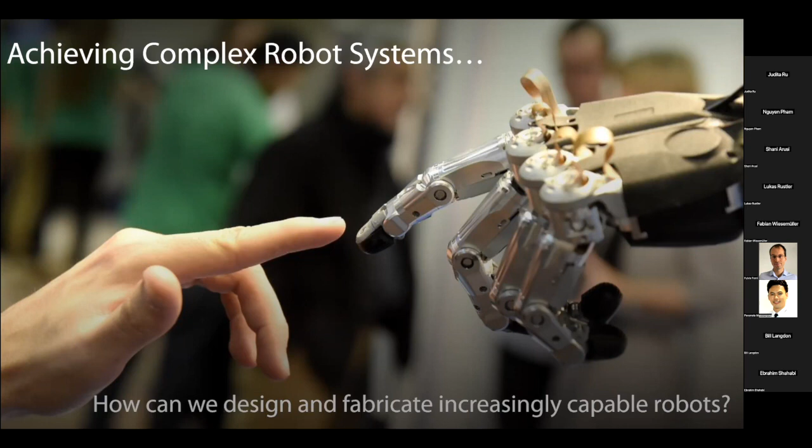And what I'm really interested in is picking up on some of the topics Cecilia talked on yesterday about this idea of ecological niche. How do we extend the capabilities of current robots from being able to operate in a very small niche environment with a small range of functionality to be able to move towards the capabilities of humans or even animals, where they can operate in these wide varieties of environments or ecologies amongst different other humans or different animals.

And also show a wide range of functionality and also perform tasks which are previously unseen or cope with uncertainties in the task domain. So we're exploring through how design and development of robots, we can try and move from the current capabilities of robotic systems closer to humans.

So I wanted to start by looking at some of the approaches we're taking at, but then looking at what are the fundamental limitations which are perhaps preventing us from reaching this goal.

So to do this, we're looking at making hardware, so in this case, a bio-inspired hand, where we can tune or vary the compliance. So here we have a 20 degree of freedom hand, but we have modularity in the structure, so we could even potentially add 2 thumbs. We can vary the structure of the fingers, but we can also vary the stiffness and the compliance.

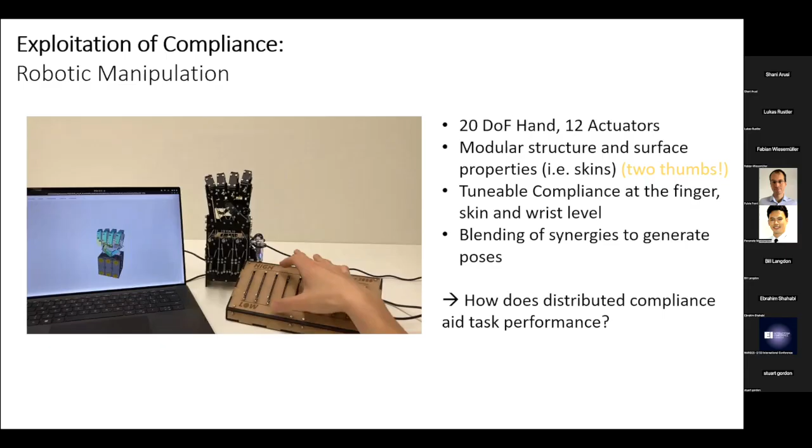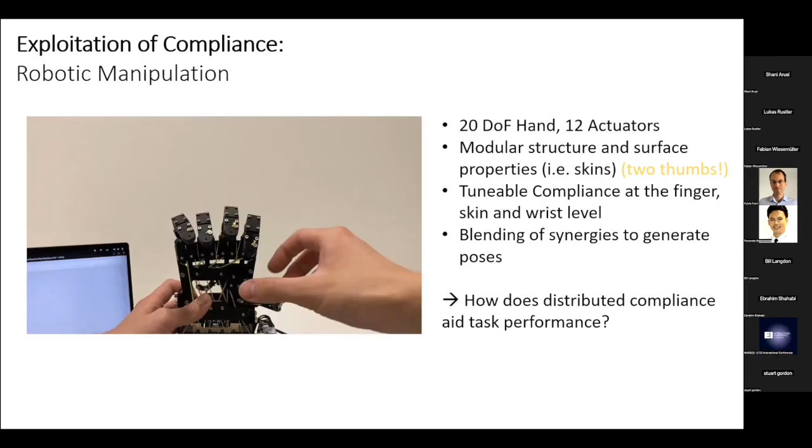So you can see here, we've just got some simple demonstrations of the tunable compliance, the ability to blend poses and synergies. And next we're looking at how this distributed compliance aids task performance. This is very recent work by one of my PhD students, Kai Junge, who presented yesterday.

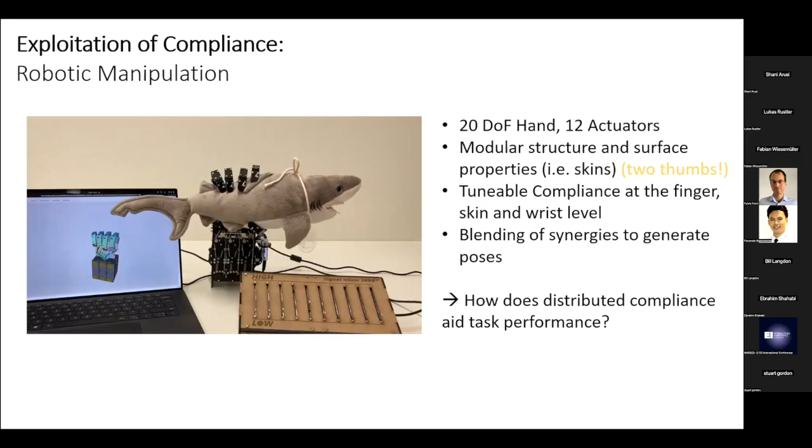A second area we're looking at is exploitation of structure. So we know stiffness is important, but how do we introduce variable or controllable stiffness into larger structures? And to do this, we're looking at architectured materials.

And we looked at how can we create architectured materials where we have a large tunability of the stiffness properties. And we developed these structures, which we call trimmed helicoids, where we take some helicoid structures and trim the inner material. And these give us some really interesting properties, as we try and illustrate on the right.

Because through control of the geometry, through the helicoid and the trimming, we can have independent control of the axial and bending stiffness. And this is really important to be able to tune and optimize not only the workspace of the robot and the compliance, but also sensitivity to noise in tendon length or tendon control.

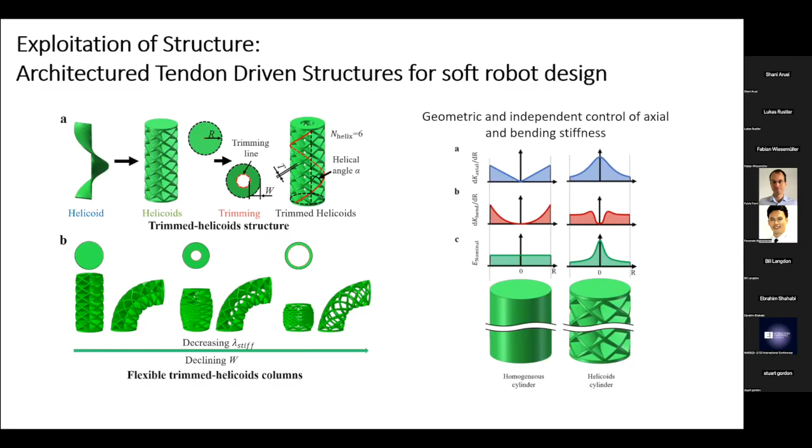So this gives us a really interesting design space of structures and materials to be able to then add actuation and form robots. So to this end, we then add tendon-driven actuation to these architectured structures to form kind of elephant-inspired manipulators, as you can see here.

And these structures can be used to create these continuum-style manipulators, which give us a great degree of maneuverability and exploration. And we can also tune, so on the bottom here, we have on the x-axis of these plots, the ratio between the bending and axial stiffness.

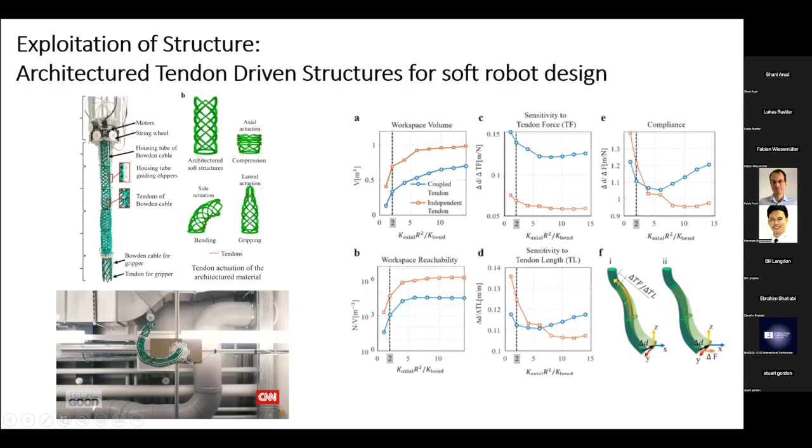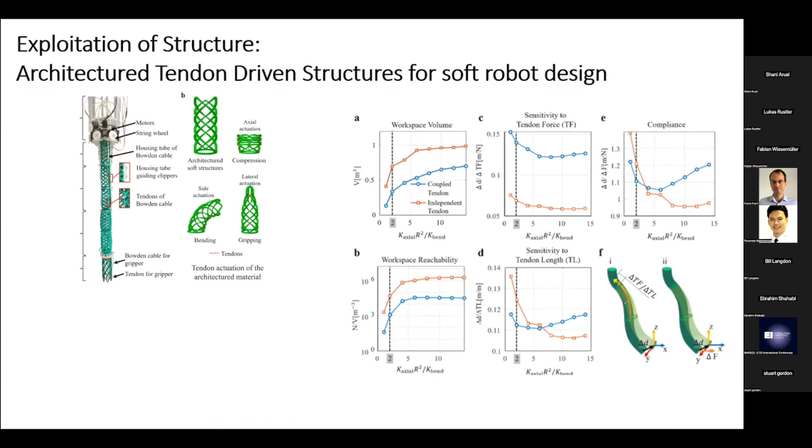And as you can see, we look at how these properties vary for this robot, the workspace, sensitivity or error, compliance, and workspace reachability. So this allows us to then explore these various trade-offs by tuning the geometrical parameters to find the optimal parameters for a given application.

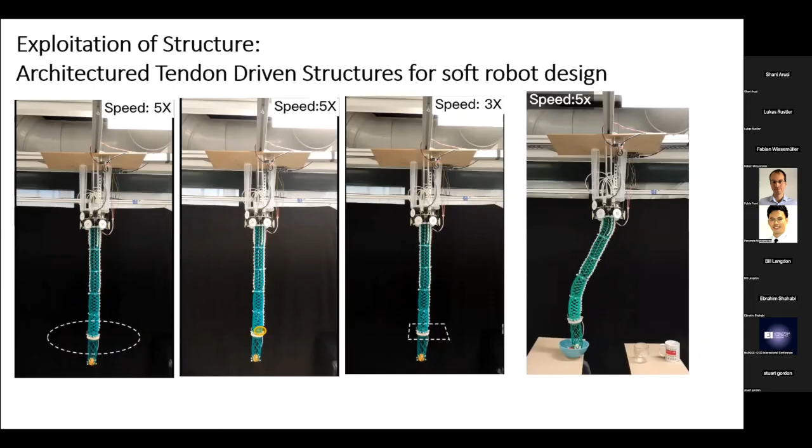So for example, we can select geometry that allows us and provides the highest precision or rejection of errors in the controller. And we can also look at the compliance, so how can we tune or select a compliance that helps with task performance and even allows compliant interactions with humans?

Another aspect we're looking at is how can we exploit materials and sensing, specifically looking at underwater structures. So here we're looking at if we have this very simple squid-like robot, can we tune or optimize the material properties to be able to improve the cost of transport or the swimming speed?

What we find is just by changing the material properties, so having on this bottom optimized structure, a stiffer root and a softer tip, we can improve the efficiency through co-optimization of the material and also this simple controller.

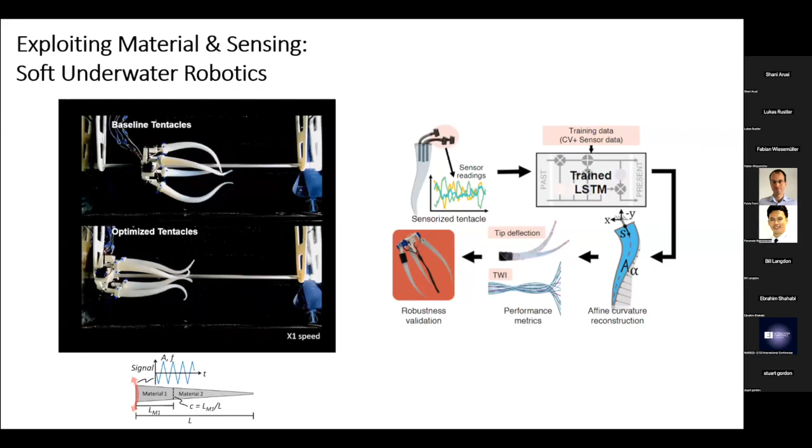We can also inject or create sensors within these soft tentacles where we can do pose reconstruction. Using this, we're looking at using proprioceptive metrics to be able to online optimize the trajectory to optimize for cost of transport or swimming speed.

The final example of embodiment I want to touch on, which is moving away a little bit from soft robots, is can we exploit environmental constraints? Can we exploit soft or somehow flexible points of contact with the environment?

An example might be that in all these cases, biological systems, animals, or even movie characters are exploiting these tethers or contact points with the environment. Spiders would be another example. So can we use this idea of tethers to provide an embodied solution to allow robots to operate in extreme outdoor conditions such as this?

One specific use case we're looking at is in glaciers or ice caves, such as what we have around us locally. We're looking at creating robots that use these variable length tethers where we have a fixed reference point to the environment.

These offer us some very interesting properties, even though it's a very simple system. We get improved energy efficiency, pose reconstruction, simplified control, and also this kind of embodied safety limits provided by the tether. This allows us to explore very large scales and very extreme terrains.

This is some recent experiments undertaken, taking these robots to very harsh extreme terrains, where we were able to go over 25 meters deep into some glacial environments to capture LiDAR data to allow for understanding of these glacial environments. But if we look at all these examples of where we try to introduce embodied intelligence into the design of our robots, compared to a biological equivalent, we're far away from the capabilities that we see.

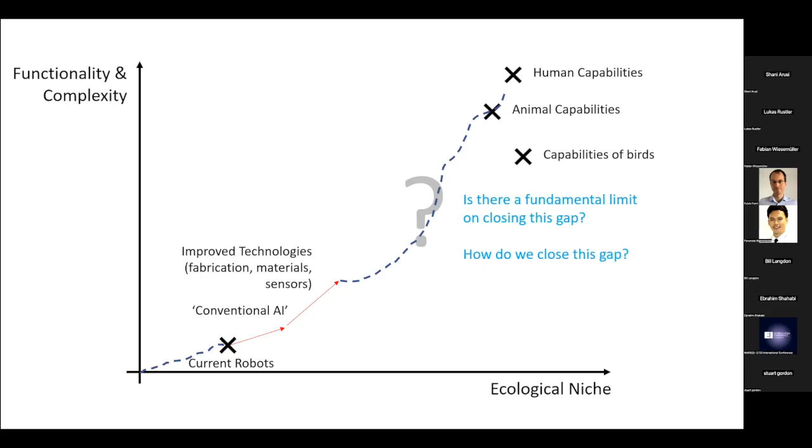I think we can take, for want of a better word, conventional AI approaches, and this can close the gap somewhat. We can also improve technologies in terms of fabrication, material sensors, and this probably can also improve the capabilities somewhat. But still, I think we have this gap that remains. I don't think this is perhaps the entire answer.

So is there something fundamental in how we approach the design of these robots that is limiting us? Is there something missing in our current approach? I think one issue is this idea of replicating the final state of a robot. Can we instead learn from biological systems that we need a more developmental and growth-based approach to design of robots?

To this extent, do we perhaps need to explore learning and processing or even design on different temporal scales, rather than this all happening at a fixed clock rate or clock speed?

Do we need to introduce more low-level physically regulated or stabilized processes, such that we have some amount of this more decentralized and offloaded approach? And can we also move to more developmental or growth-based design?

Finally, I think to move to an area with a wider environment and wider functionality space, we also need to think of what's a meaningful evaluation or fitness function. What are we trying to optimize for beyond a single task? Can we look to biology to understand again what are meaningful fitness functions or objectives to try and achieve?

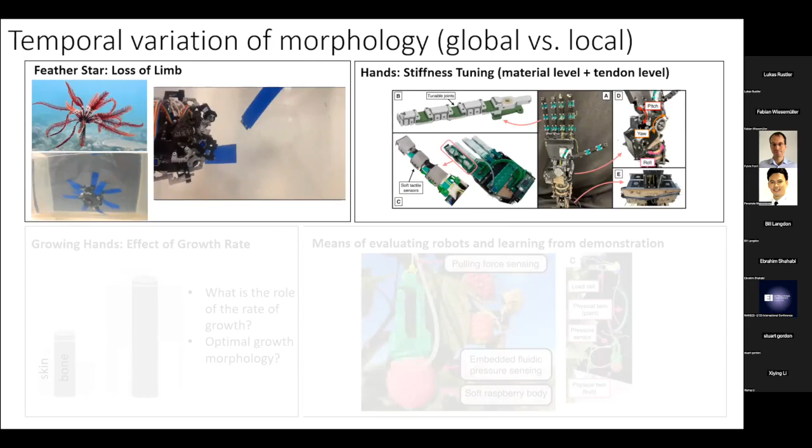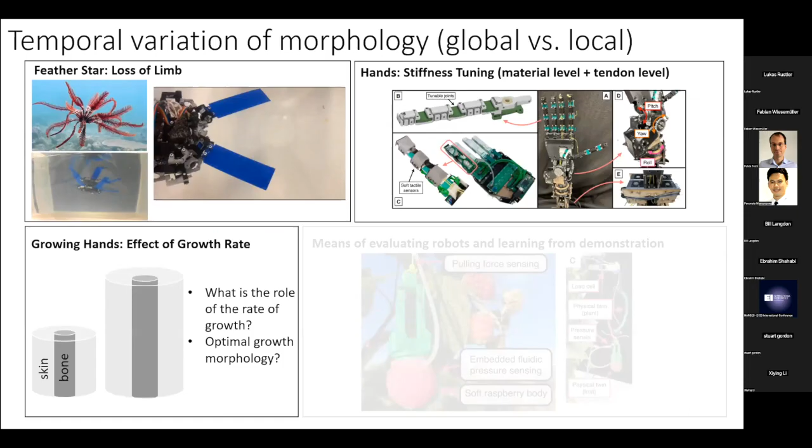Within this area, we're looking at a few approaches to addressing some of these questions. First, perhaps looking at online change of morphology to see how that can aid control. As I've already discussed, looking at tunable or online tunability of compliance, looking at the effect of growth and how growth affects our ability to learn, and how can we couple growth and learning together. And also for creating meaningful tools for evaluating robots.

Here we're creating what we call a soft sensorized physical twin to evaluate how a robot and a human can perform complex tasks, such as harvesting of a raspberry.